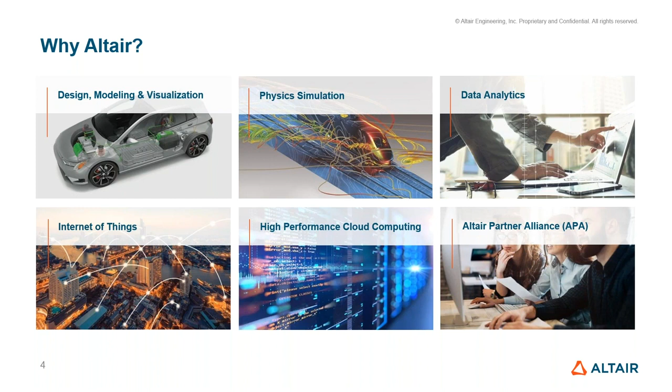Why Altair? So Altair is pretty well known in the market, serving different industry verticals, where we can actually provide end-to-end solution that starts with the designer on the ideation phase to a CAE analyst that can solve some multiphysics capabilities, and it goes all the way up to the manufacturability and even digital twin, where we can leverage our data analytics solution and our IoT platform to build a digital replica of a model and compare the results. We also leverage our high-performance cloud computing solutions, where customers can actually run a lot of these jobs at scale and in a really quick period. Finally, Altair also has a unique licensing platform where you can access third-party applications using our existing license.

So how exactly are we serving the consumer electronics market? Our multiphysics platform provides end-to-end solution where we can solve problems at different stages of your product life cycle. We can begin at the component level, focusing on the structural integrity, PCB and antenna design. We can go at the assembly level, where we focus on the interaction between multiple parts, where we can evaluate electromagnetic compatibility, thermal behavior, vibration, and even the acoustic performance of that product. And finally, at the system level, you can build a digital twin of your physical asset and optimize the entire product performance. So we leverage our optimization solution at every single stage, and we can also leverage our high-performance computing and cloud computing capabilities at every single stage of the product lifecycle.

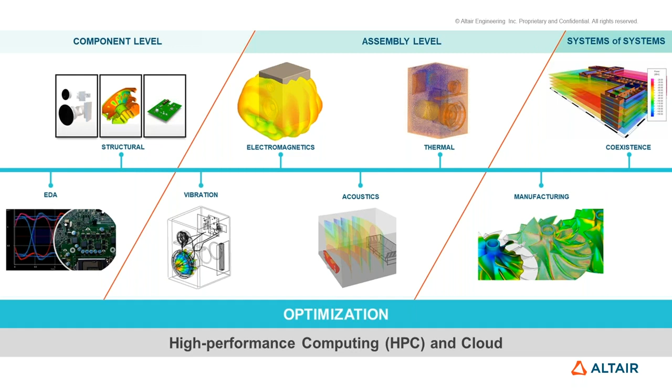So what's our value proposition to the market? Time to market is one of the biggest challenges in the consumer electronics industry, and Altair's multiphysics simulation and optimization workflow has helped customers reduce physical testing costs and streamline their simulation iterations, even leveraging our machine learning algorithms. So customers can solve a wide range of applications and achieve this efficiency gain using a single flexible simulation platform utilizing a single license. So that's the key takeaway from this entire webinar series, that you can pretty much perform anything that we show today using a single platform and a single license. You don't need to add additional modules that we would present today.

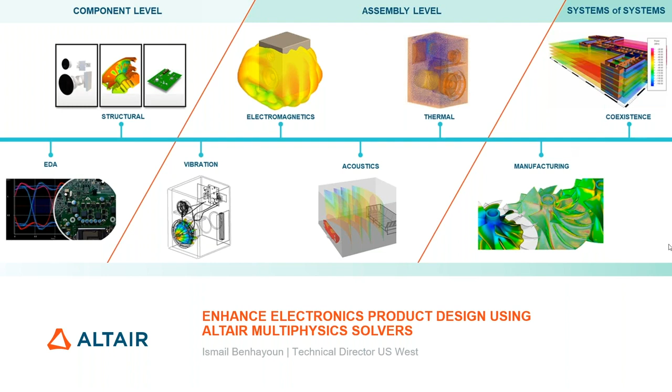So we are actually focusing on the electronic devices and products. And obviously, as we all know, they have certain trends and challenges. We all see this trend of miniaturization. Things are getting smaller and smaller. Computers are becoming tablets. Tablets are becoming phones. And at the same time, performance and expectation on performance is continuously increasing.

At the same time, we see that there is a huge competition. Sundar mentioned the time to market importance and how many products need to come out there, and the challenge on the cost and the cost reduction. So every manufacturer out there is trying to reduce that aspect. The more you think about it, the more you see that all these trends are driven by customer expectations. We are people in the industry, but we are the customers at the same time.

And what is hidden behind these customer expectations? A big part of it is perceived quality. So here is already a big question mark. What is perceived quality? It could be defined and expressed in many different ways. One word that summarizes perceived quality is subjectivity, right? I've put a definition of perceived quality here, which is defined as the customer perception of the overall quality or superiority of a product or service with respect to its intended purpose relative to alternatives. In other words, it's actually the perception aspect.

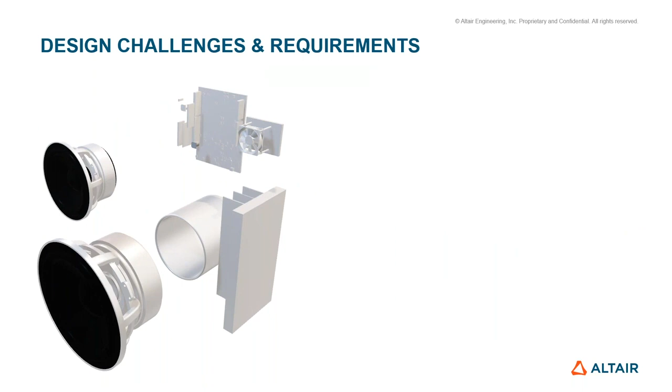What you see here is a model put together by the Altair team. We have been working around the different parts in this assembly, everything from the loudspeakers to the PCB assembly to a fan to the heat exchangers. And we're going to pick a couple of challenges and requirements here and see how we can solve them together. One of them is looking at the fatigue and function losses due to vibrations and due to the operating mode of this assembly. We could also look at sound pressure levels, basically the sound quality. How does it match certain targets? How does the speaker assembly perform in different environments?

And a final aspect here, and this is where we start touching on perceived quality, is: are there any buzz, rub, squeak, or rattle? Don't worry if you're not familiar with these terms, I will define them in more detail later in this presentation. But if we were to look at these four main requirements, one essential aspect is actually the load definition. We need to know, first of all, what are the loads to be considered.

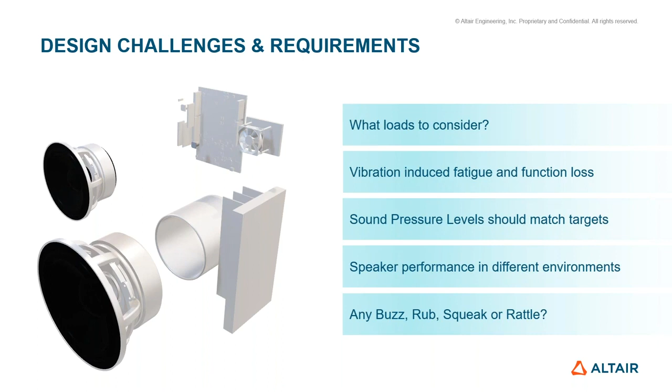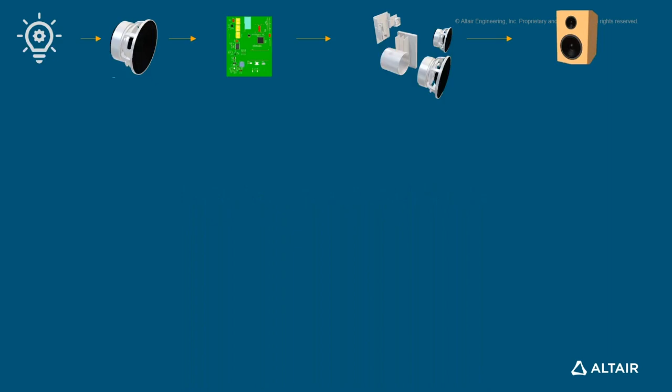So you can see this as the agenda of this presentation today. So let's zoom out for a second and look at the product development cycle. Typically, and I would say always, it starts with an idea, with a concept, and it goes through the steps of developing a design and maturing a certain design of components and system and putting all these systems together.

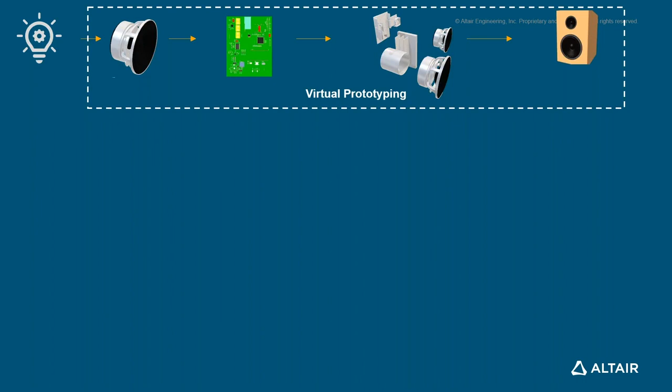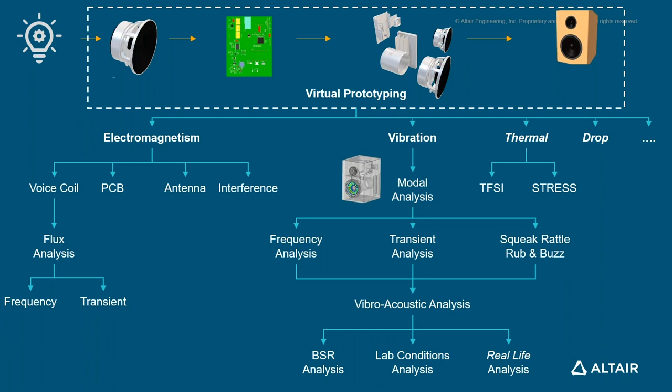It is essential to know and remember that these complex products require multiple attributes to be checked, everything from different physics, electromagnetism, vibration, thermal analysis. We will be looking through this complex matrix of validation. This is the topic of today. Now, in order to solve all these physics, it's very important to have a simulation process that allows to analyze all these aspects during a reasonable time.

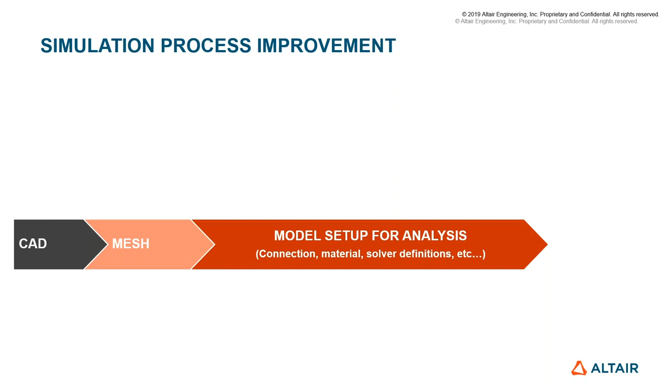In the previous presentation, and Sundar mentioned that earlier, my colleague went through in a lot of detail how this simulation process could look like or typically looks like. So for example, to set up a CFD analysis, thermal stress, nonlinear analysis, and vibroacoustic, you typically see in the industry multiple engineers working on multiple models, multiple interfaces, and spending, let's say, roughly 10 man-hours per design iteration.

Why Altair? What are we proposing? We are proposing a radical change in this scope. We propose a process which is quite unique and is based on what we call the single model multi-attribute. This is about one single platform to execute and to analyze all this physics. And it's about reducing up to 70% your time spent on simulation and analysis.

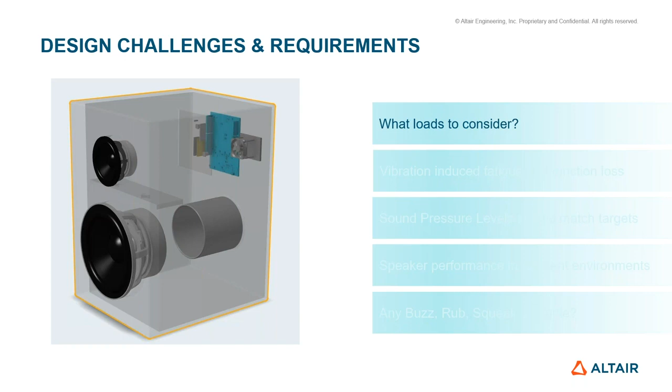So back to today's topic, where we will deep dive in certain specific cases. Step number one, what are the loads to consider for designing the speaker? Well, if we take a vehicle, we all have a car, we've all been in a car, let's say. A very important aspect in designing a vehicle is the load definition. These road load excitations will define how all these parts need to look, how stiff they need to be, and how comfortable a car will be and how durable a car will be.

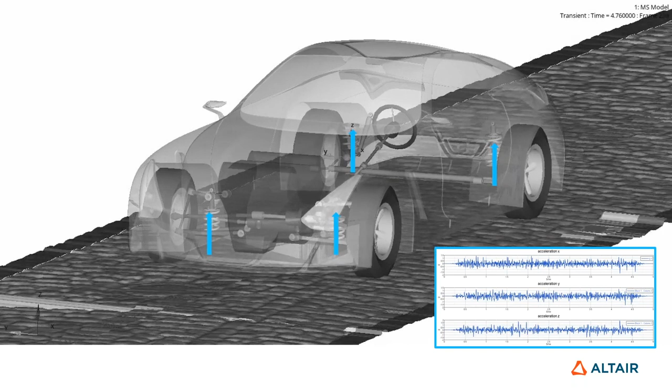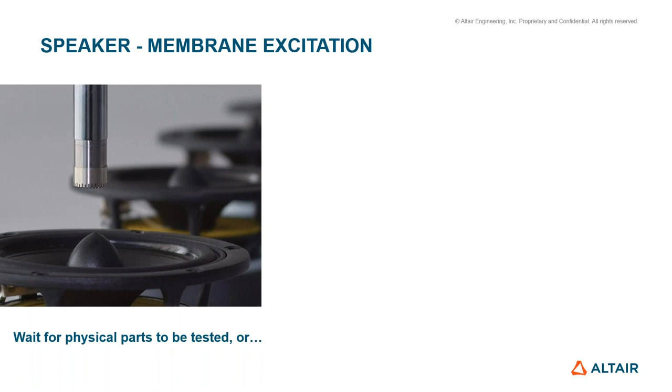Well, for electronic devices and products, it's not different. It's not different for a speaker either. And in this case, we're talking about the speaker membrane excitation. We can definitely wait for physical parts to be physically tested, or we can apply simulation. Well, it's about applying simulation. And this is what you can do in Altair's low frequency EM simulation platform.

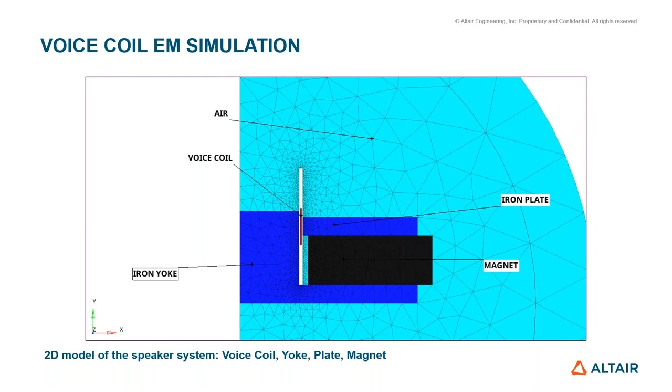We have the capability to model these voice coils, magnets, and plates and simulate these systems. We have the possibility to define this parametric model, so it is very easy to adapt to the size of your products and to the versatility of the products you might have. In this platform, we have embedded material libraries, which are also fully customizable. So it means that you can bring your own knowledge into it.

Very important in a voice coil simulation is actually the type of currents you want to use. They could be driven by a formula, basically a sine sweep or anything like that, or they could be driven by a very specific load. So when you think about it, it's actually if I want to see how my membrane vibrates for a specific song or for a specific track that I use to design my parts.

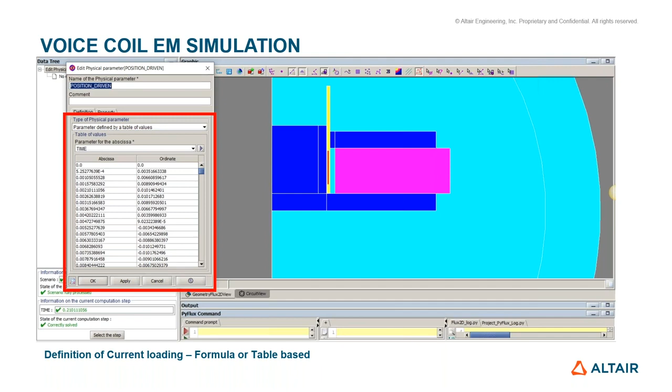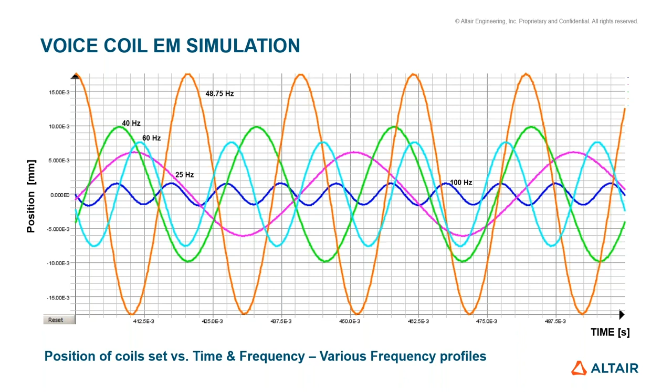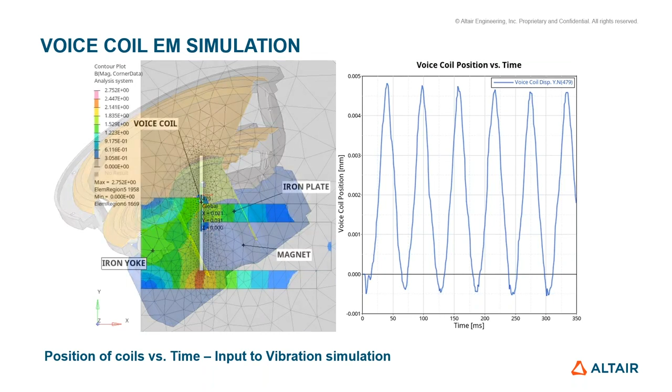So what's happening in this process is obviously the electromagnetic simulation calculation and flux calculations. But what we can get from the same simulation is actually the position of the coil and how the position varies versus time or versus frequency. Well, this is nothing else than the loads that are required for our simulation. The way the voice coil vibrates or moves is the way the membrane vibrates. And these are the loads that we can take into our vibration and finite element simulation.

And here you see, for example, a component analysis. This is the speaker itself analysis, and you see how the enforced displacement will result in the vibration of the complete system. So now we have the loads, and we can bring these loads into the system and apply them to the rest of the assembly.

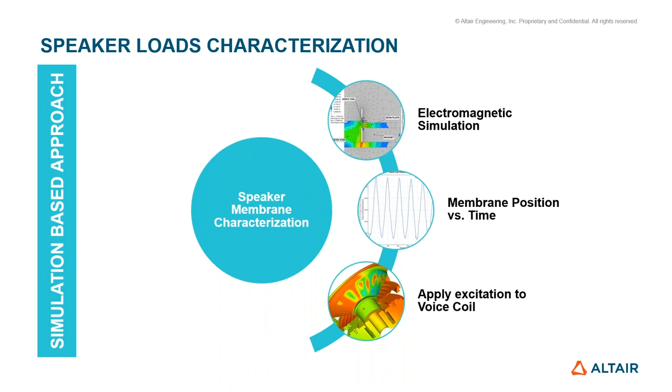So very importantly, we have a well-defined workflow, a well-defined capability to do this type of analysis, and in some sense define the loads because they are very important. So now that these loads are ready, we can move on with the other attributes because we have the prerequisites.

So we will dive in now into the vibration, the different types of vibration analysis. It goes without saying, everyone starts with normal mode analysis. This is the basic requirement. And when we have this model in place, we will start looking at certain specifics. One challenge or one element we defined from the beginning here is actually to look at the induced fatigue due to vibration. And we take the example of a PCB.

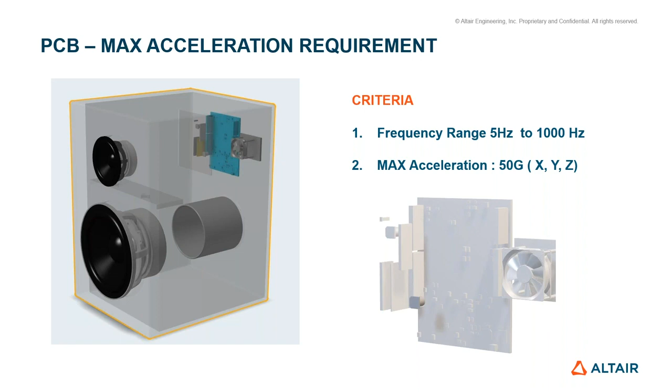Let's say that we have a criterion here that within a frequency range from 5 to 1000 hertz, the maximum acceleration that the PCB should withstand in all directions is 50 Gs. Well, the analysis process that we will follow is taking this finite element model, applying the different excitations at both speakers, and investigating these different vibration levels, going through the complete process of diagnosis and optimization when required. So let's look at this in detail together.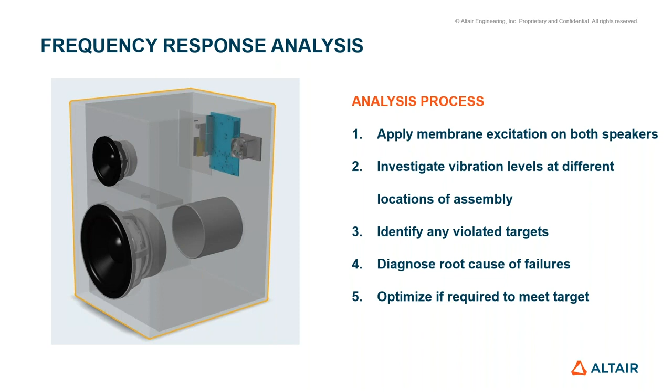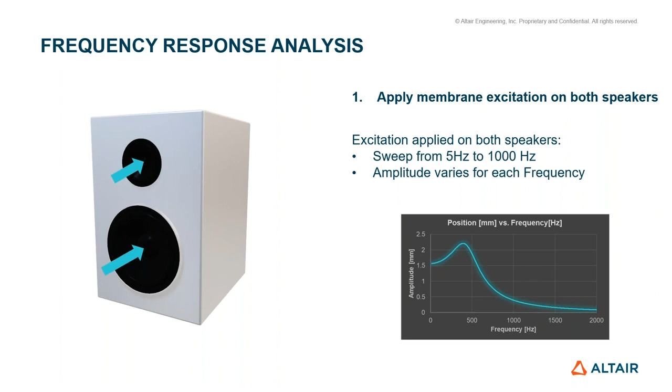Applying the vibration profiles, in this case, we are working in the frequency range. We are focusing on the 1000 hertz range because this is where we have the highest amplitudes. In this analysis, there is no limitation on how many outputs we need. We could be tracking any system or any part in the assembly. For this particular example, we are focusing on the PCB, and we want to track this acceleration as I mentioned earlier.

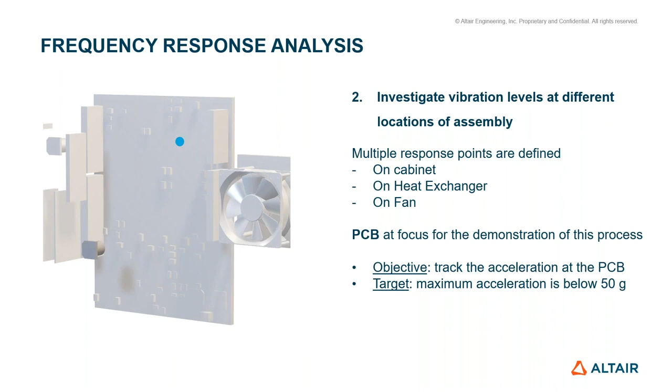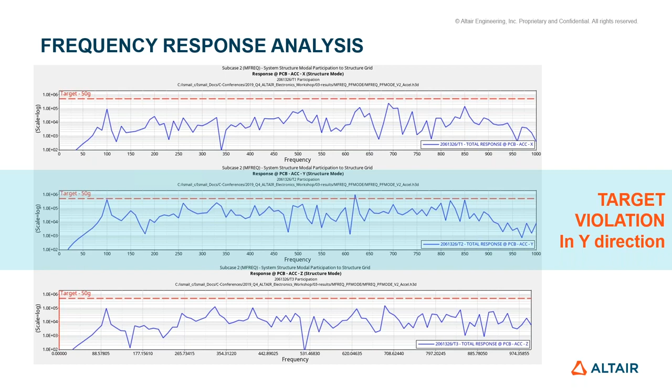As part of this workflow, which is highly automated, we can track this particular, let's say, accelerometer location and see how the acceleration levels compare to the target. And we can see automatically that we are violating a certain target in the Y direction. So from here, we can use the very advanced functionalities and deep dive in these results. Because as you know, as an analyst, my function is not only to find the problem, but actually to understand the root cause of these problems.

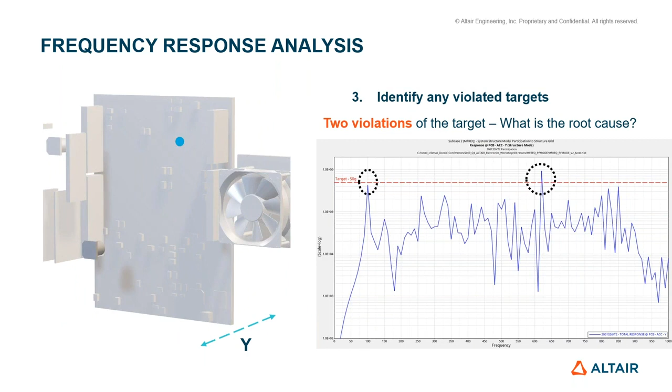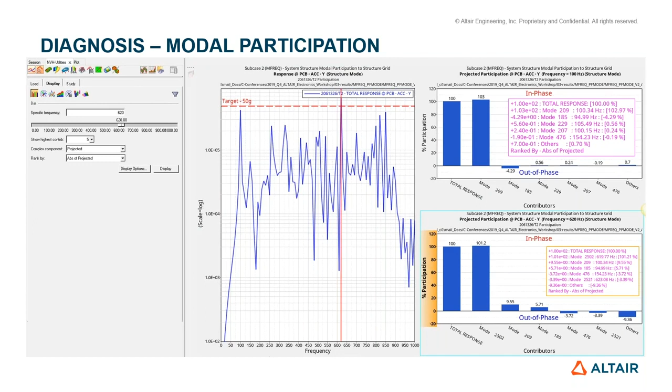So through very advanced diagnosis capabilities here, everything from modal participation, critical mode shapes, and what-if investigations, we can deep dive and understand what are the modes that are the most contributing. How do they operate? Are they in phase or out of phase? Are they driving all in the same sense? And when I'm deep diving into this, now I have understood where the problem is located, what is causing the problem. Now I can work my way into solving this problem.

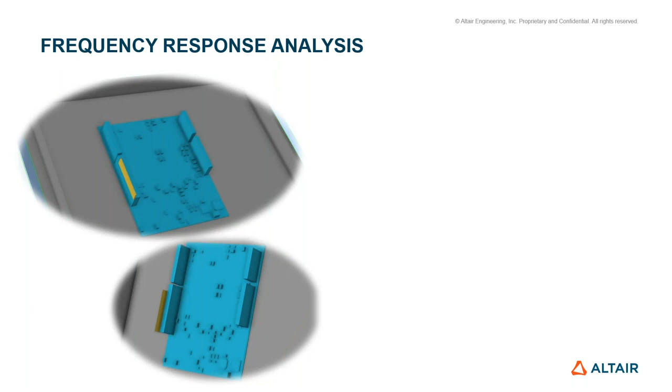And in order to solve this problem, there is the traditional approach of, I would say, guessing and iterating manually, or we can use numerical optimization. In this case, we're showing an example where we will use numerical optimization to minimize the acceleration levels at the PCB. And so as you see here, the way I will do it, and you can imagine there could be many scenarios out there, we are looking at the fixation strategy or the connection strategy between the PCB and the cabinet. And the technology we are using here is actually a 1D topology optimization targeting the full frequency range.

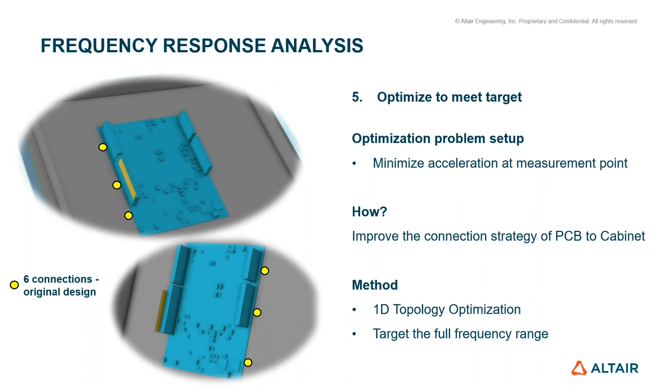So to the left side of this slide, you see the initial connection points. And with, let's say, a discussion with a designer, we could be adding some new possible fixation locations. This could be discrete locations, or it could be a complete space, and we could use different techniques. But out of this analysis setup and optimization setup, the results are very interesting. This is what you see here.

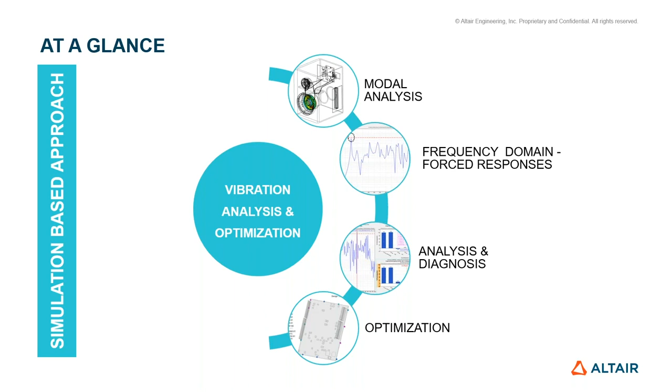So again, at a glance, it's a very well established process and workflow that starts from the basics of the vibration analysis, modal analysis, to forced excitation in the frequency domain, and the full-blown capabilities with the analysis, diagnosis, and optimization.

Number two. So now that we looked at, I would say, on the structural side, what we can do, let's see now how we can transition to the acoustic part and looking at sound pressure levels and environment effects. So the acoustic analysis is nothing strange. We are using, again, the same finite element model, applying the same excitations at the different speakers, but now we are creating what I would call a microphone wall. So basically a series of microphones at a very specific location of interest.

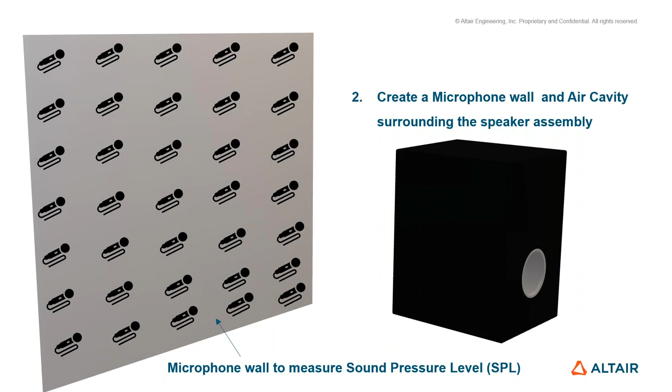And I'm adding this air cavity around the speaker and also in all the gaps of the speaker inside of it. And this is what I would be able to analyze in this case. I'm looking at the sound pressure levels at any location surrounding the speaker. I'm using an infinite element approach in this case. And I can now start to deep dive in every aspect of these results.

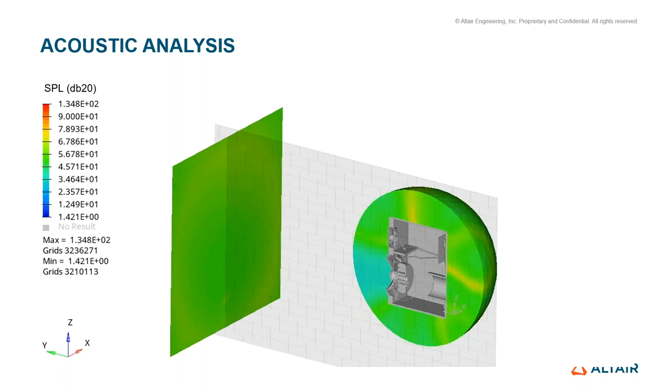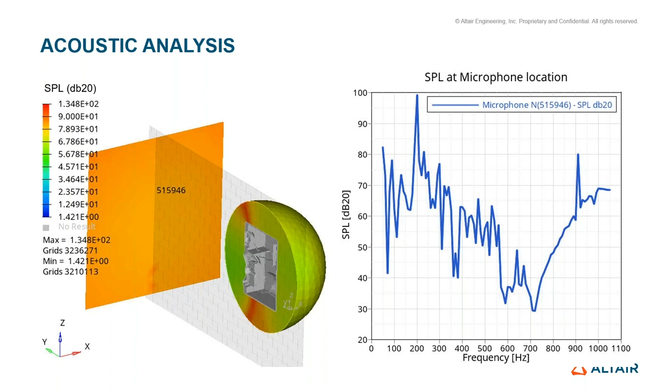From a 3D contour like this one, I can go on a single microphone and look at how the sound pressure level will vary in the frequency range and understand the different effects and the different peaks. And everything I've shown before in terms of diagnosis, relative modal contributions, and frequencies is available for this type of analysis. So again, I want to summarize that going from the structural model to this acoustic model is just a continuation in the same workflow.

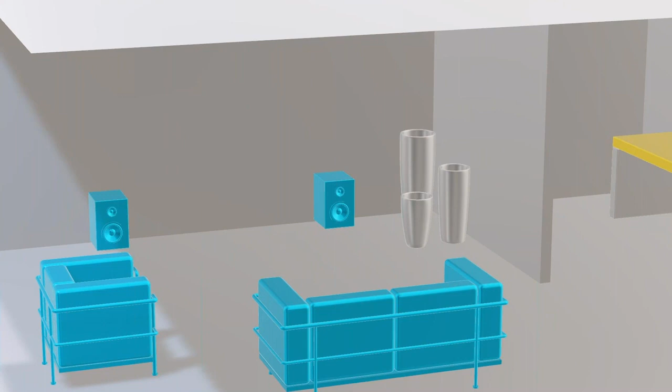And most importantly now, because I can imagine that many of you out there are already thinking, what I've seen here is a one system evaluation, we've done this modal analysis, we looked at these loads, we looked at the sound pressure level. How scalable is this? Well, I want to say that this is one of the key capabilities that Altair offers, this scalability level. I can very easily go from one speaker model to two speakers, these two speakers into an environment which I'm interested to analyze, because this is how I'm getting closer to my end consumer and to understand the performance of my product.

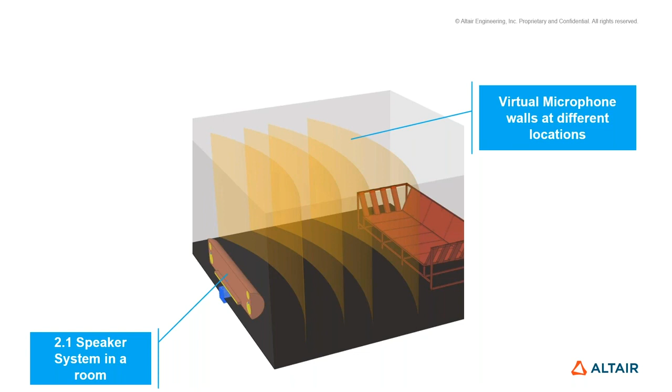So in this example here, I'm showing how we can build a room, let's say, where you have your 2.1 speaker system, and we are creating these multiple virtual microphone walls to track the sound pressure levels. And exactly as I showed for one system, we can scale that up and look at that for the complete space. We can track how the sound pressure level varies, where we can have some dips, what are the differences at the different locations. Anything I'm plotting here is actually all these microphones that I have been setting up. So again, very powerful and very scalable capability from one system to multiple systems.

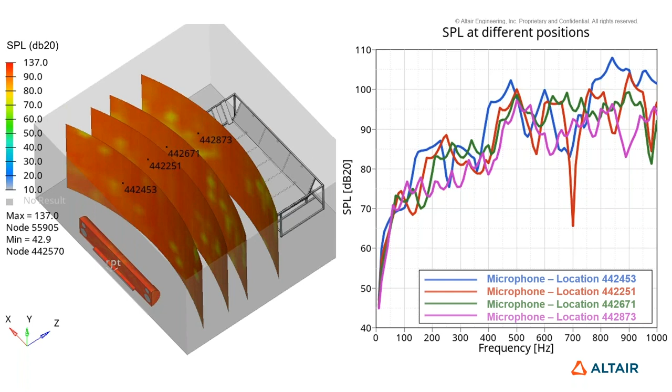Now I would like to go to the next point. And again, we are in this notion of perceived quality, remember what we discussed from the beginning. So what is perceived quality? Why are we talking about buzz, rub, squeak, and rattle? So let us define this and make sure that we are all on the same page. So if you've ever heard about squeak, rattle, rub, and buzz, they are basically unwanted noises that are occurring where multiple parts will come in touch or start rattling or touching each other under certain vibration states.

So we could go very much into technicalities on defining all this, but what's very important is that these phenomena are known in the industry to be the primary causes of lack of perceived quality. And they are not unique to a single industry. You see them appear in all types of transportation, you see them appear in consumer goods, and unfortunately, they are still tackled in an old-fashioned way, meaning with physical testing and quick fixes in the late phases of the product development cycle.

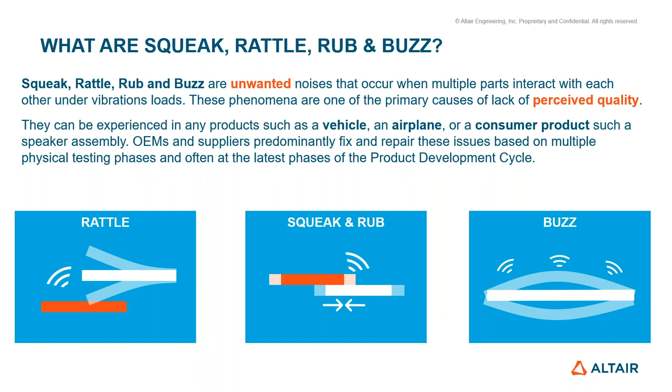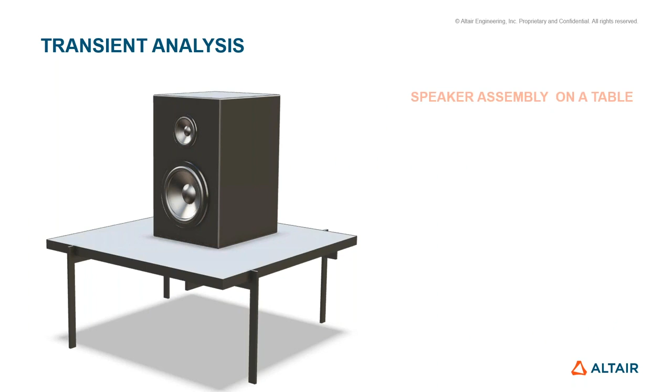So are there any alternatives here? Yes, there are. And this is the process I want to show you here in this second part, where right now we are switching from that frequency domain analysis and going to the transient time domain-based type of analysis. Again, the same model will be used.

We're setting up, let's say, a scenario where we have a speaker on a table. We have the full capability of modeling the interaction to the table, like the rubber pads, for example. We will be able to track the overall displacement of this speaker. We will apply the excitation as we've seen before at the two membranes.

And on top of this, we will be using one of the best practices in the industry for almost a decade now. It's the so-called E-line method. So just to bring some clarity here, the E-line method is actually a methodology based on the analysis of interfaces between parts. And you can imagine that we are creating sensors all over the place, wherever we want to.

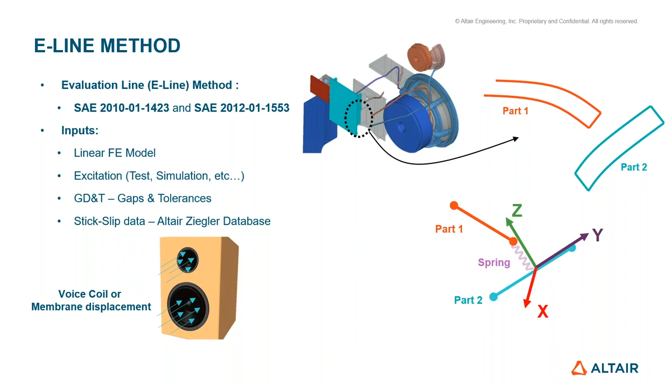And these sensors are nothing else than, I would call them, virtual accelerometers, meaning local coordinate system definition and spring elements to track the relative displacement between the parts. All this is done on top of this linear finite element model we've been using so far.

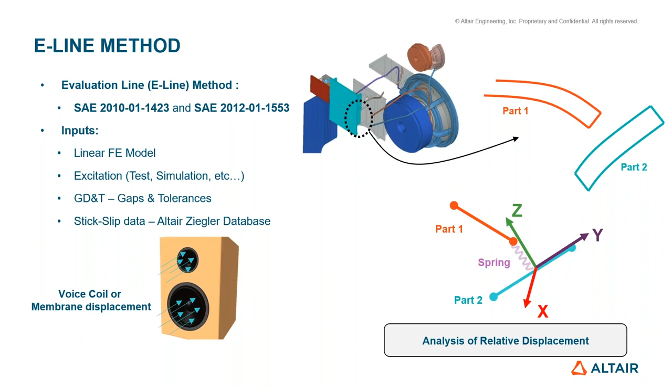Now, I've got this question many times before. Well, my products have hundreds of interfaces. We deal with very complex assemblies and packaging situations. I want to say, do not worry. We have highly automated processes that allow the user to go through the creation of many of these interfaces, manage them, create all the relevant load cases related to it, all again in the same interface using the same model that is existing.

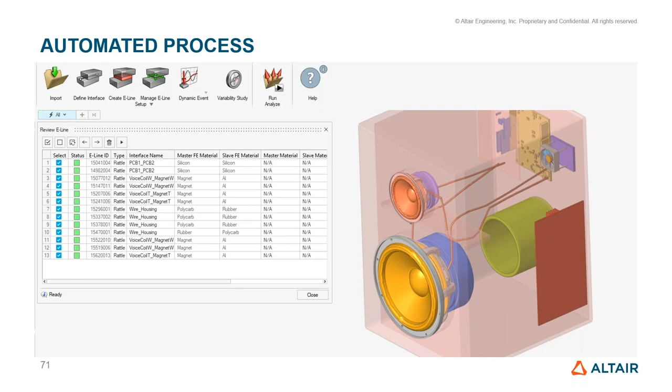So let us zoom in and see how this process works through this example. You remember our assembly, and now I'm zooming in on a location between two components, between the PCBs actually. And what you see here is that I would be able to track my transient analysis result and the relative displacement between these parts. How do I track that?

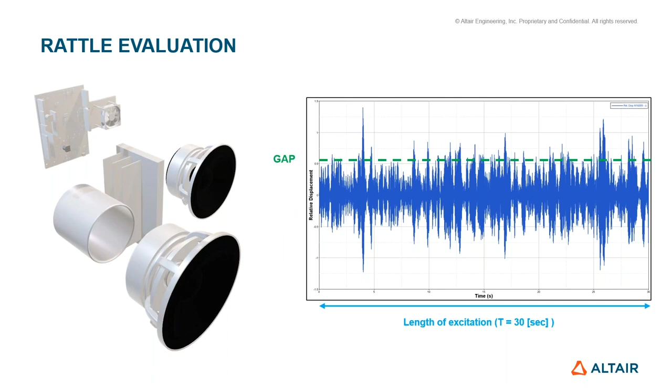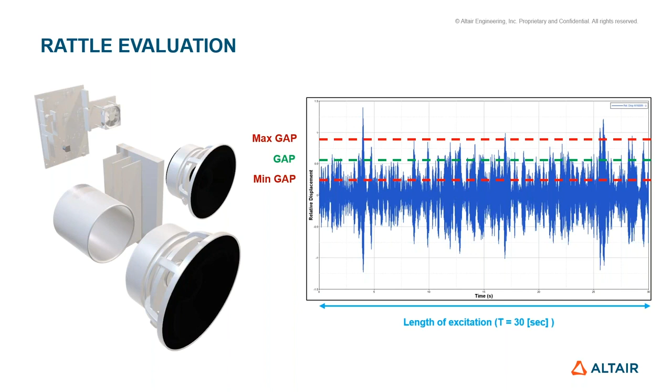Automatically, the relative displacement is extracted from this analysis, and the relative displacement is compared to my gap. My design gap or my GD&T. It is also taking into account all the tolerance variations. So we are really entering into a quality perspective. And this is done for all the interfaces that you might have created in your assembly. There could be 10 of them or there could be 100 of them.

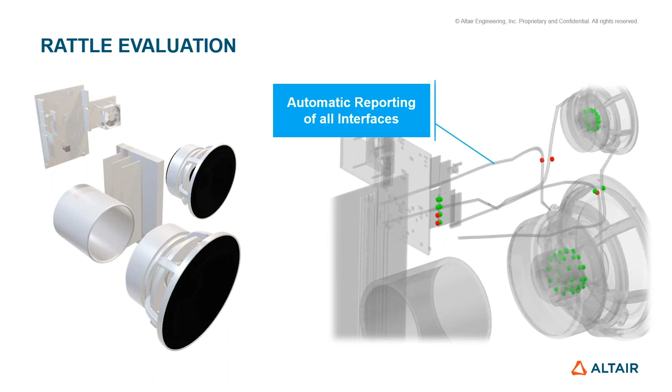And from this very high level, I would say visual representation of good and bad, problem and no problem, we can deep dive into the details of these results. And again, an analyst's job is about finding the problems, but also understanding the root cause of these problems. This is why we have these high capabilities in terms of modal contribution, in terms of understanding how these modes interact with each other, and what-if scenarios.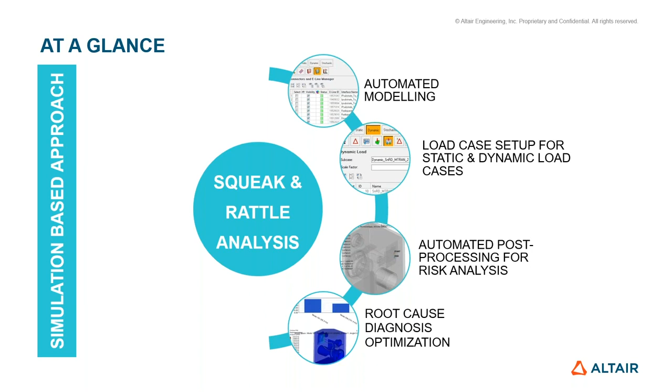So in a nutshell, again, what I'm showing you here is very advanced capabilities, but most importantly, all packaged in highly automated workflows and processes, which I believe is very important for the execution in a real product development cycle. Now, we've seen how we could identify these different issues, how we can set up these different analyses.

Now, let's say that we have identified this rattle, can we consider this rattle in the acoustic analysis? Well, the short answer is yes. We have that process in place again, where from the rattle analysis result, we are able to go back into more of an explicit type of analysis to extract the contact forces at these interfaces, these problematic interfaces.

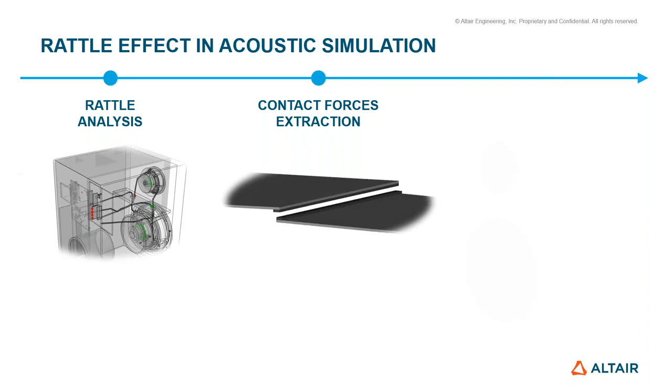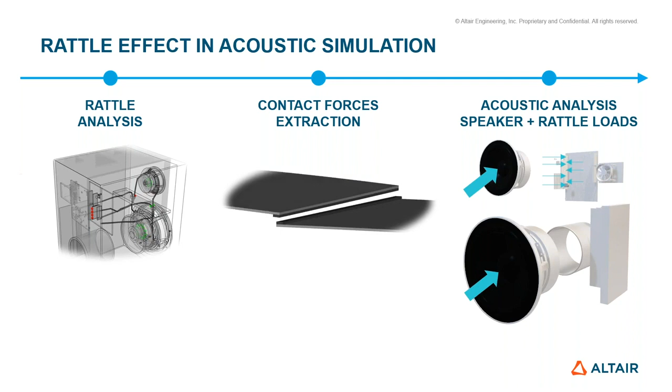And we can circle back to our linear finite element model to combine both the original loads coming from the speaker, but also the contact rattle loads. And when we have set this up, we are now able to compare, and I named them here as a perfect model versus a rattling model.

What perfect model means is actually a model where the rattle is not considered. Rattling model is where the loads from the rattling are considered. And while it might be a little bit difficult to see the differences in a very generic 3D contour like this, we can deep dive into the specific microphone recordings and understand the differences.

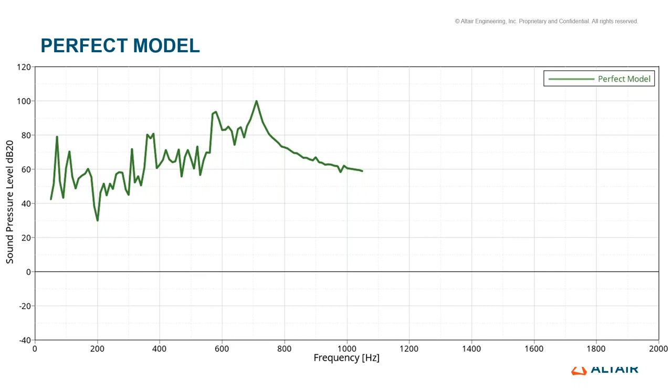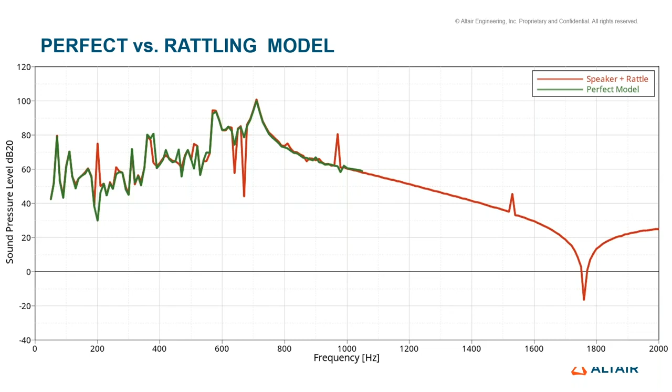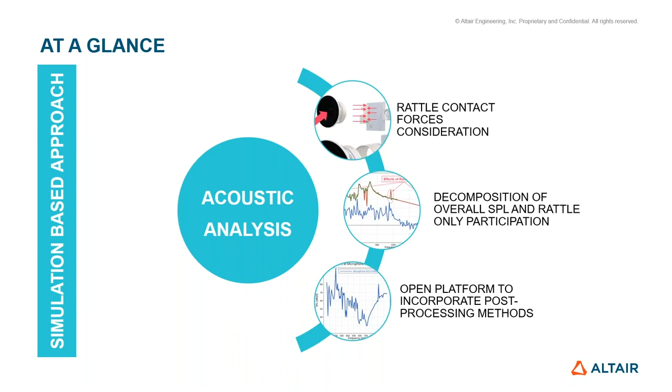So here, this is very powerful because now we are able to see the effect of the rattling and understand, close the gap from the structural analysis to the acoustic analysis. So basically, would we hear this problem? How severe is the problem? So a lot of questions can be answered here. So definitely, again, I insist on this. Capabilities are added and exposed to you, but more importantly, all this is packaged in a workflow and a single platform of simulation.

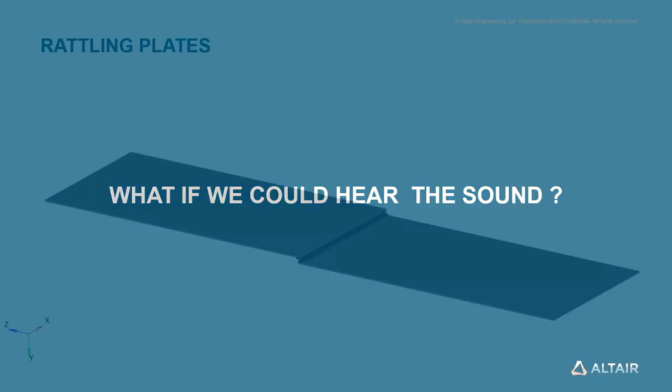Now, let's put the cherry on the cake. What if we could hear the sound? Well, I want to say the short answer is yes, we can do that. And due to the setup here of a webinar, and you will not be able to hear the sound coming out from my computer, I stepped back to a more simple example, which I think you would be able to relate much easier. If you have two plates that are vibrating and contacting each other, rattling against each other, I think that you would very easily imagine the clicking sound, the repeating clicking sound during a certain period of time.

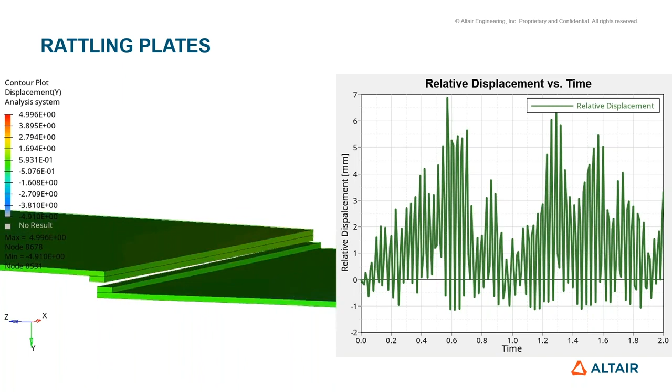Well, what you see here is actually the output of the relative displacement of these parts. And here you see the acoustic results, basically my pressures, amplitude, and phase. So what I'm able to do here is actually pick these results from the acoustic analysis and plug them into a post-processing capability in our mathematical tool based on Compose, where we can actually generate the sound pressure level versus time and generate a wave file and listen to it.

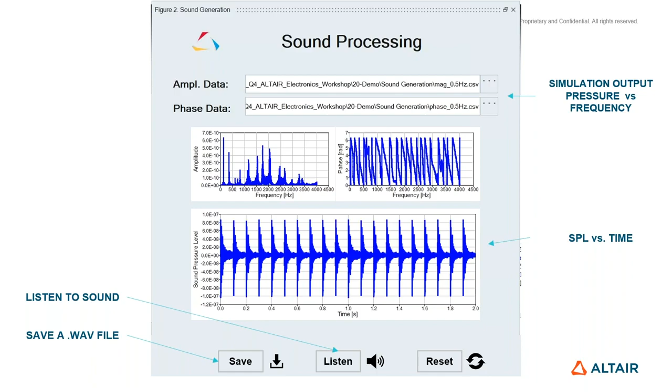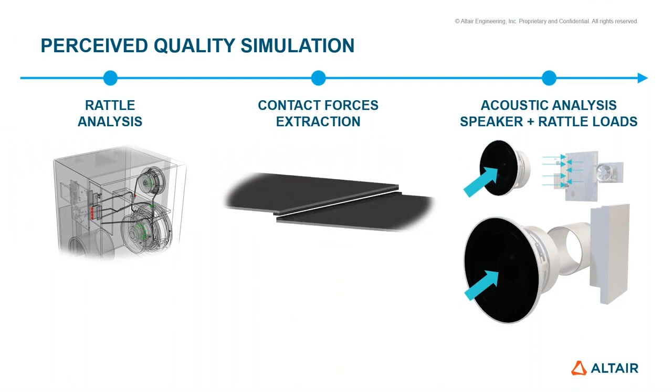So what we are creating here is really trying to close that gap of subjectivity, right? Will this rattle occur? How severe it could be? I can analyze it and see if it's worth to be investigated. And if it's worth to be investigated, can I listen to it and see how severe it could be? So I want to say in a nutshell, what we are talking about is about enhancing the simulation process, adding more capabilities and focusing on workflows. So as you see, going from the rattle analysis to the acoustic analysis, but we are adding that last step, which is actually generating and listening to that sound output.

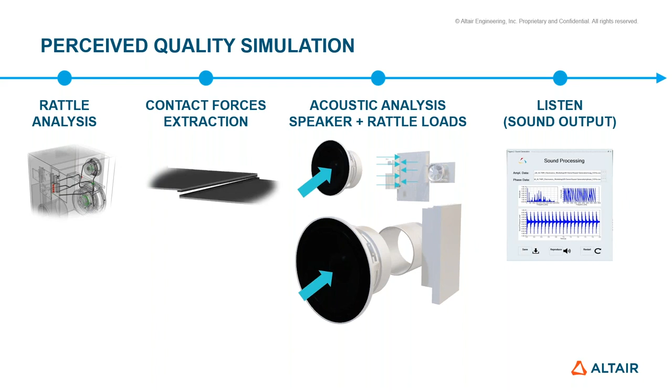To conclude from my side here, I just want to go back to where we started. We took this system, a speaker. As you see, it's probably not the most complex of the smart speakers out there in the market, but we took certain challenges and requirements, very few of them, and we could see already how these challenges means multi-physics and multi-attribute and multiple solvers to be considered, a quite complex matrix and, I want to say, the need of quite advanced capabilities.

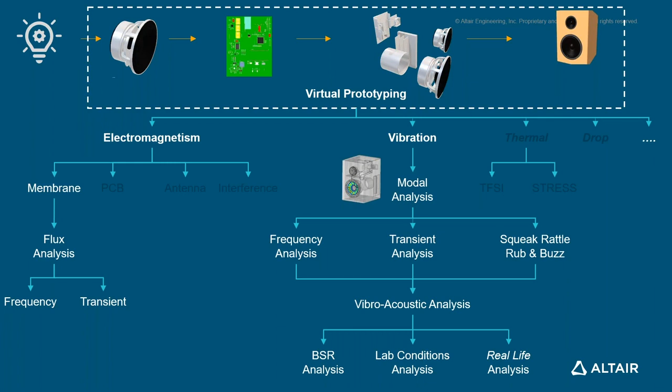But once again, and I think Altair key aspect here is to propose capabilities, but not only the capabilities. It is very important to propose them in the context of a process and a workflow that allows them to be incorporated in an existing product development cycle to match the times or be even faster.

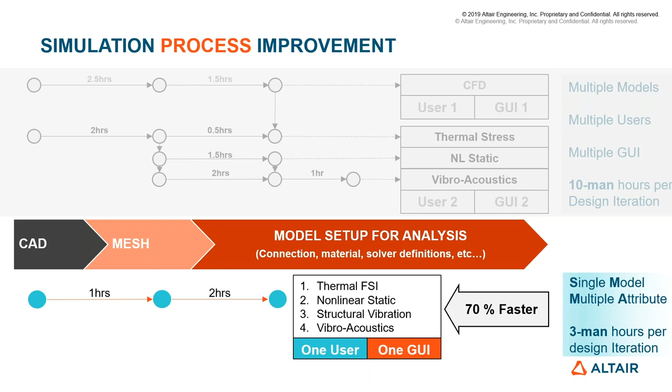One last question that we have here is, so in your presentation, what were you using for acoustic simulation? So for the acoustic simulation, we are using our solver, OptiStruct. And I can mention that in terms of capabilities, we can cover the different needs of the low frequency or the high frequency. For the low frequency, we are using the finite element approach and the infinite element approach with OptiStruct. If there are needs for the much higher frequency, as we see in other problems, we can use our solver SEAM, which is based on statistical evaluation, statistical energy approach.